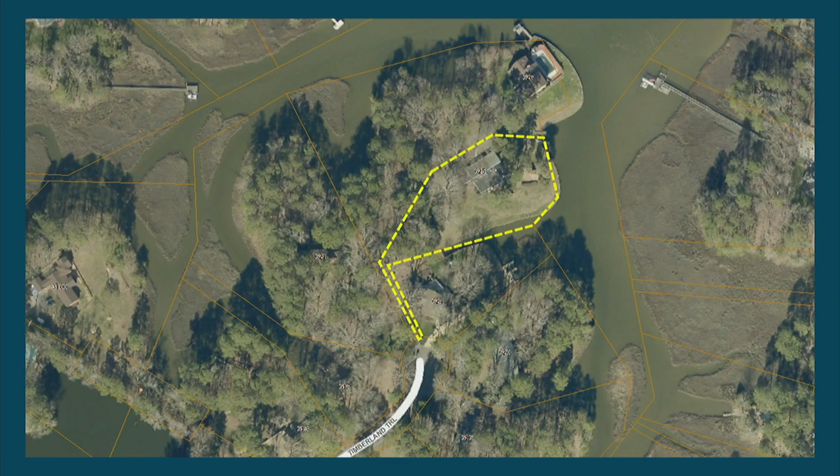Staff moves on to the next agenda item. Agenda item number 4, 1440 West Little Neck Road.

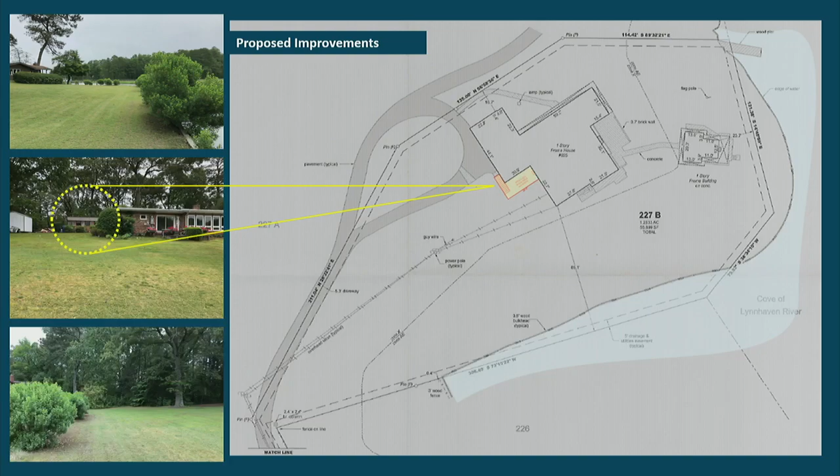The request in front of you today for agenda item number 4 is encroachment into the resource protection area buffer to construct an in-ground swimming pool and modification to the existing paver patio, with an addition to the primary structure.

One of the reasons staff is recommending this item for the consent agenda is that when we conducted our field visit, we met the property owner at the lot. He described that with the addition to the primary structure, they're going to demolish the existing garage and rebuild it with a second story. In doing so, they'll have easy construction access into the rear yard without going around the existing structure, avoiding removal of trees or impacting the critical root zone. Once the swimming pool is constructed and contractors demobilize, they will then build the addition to the primary structure.

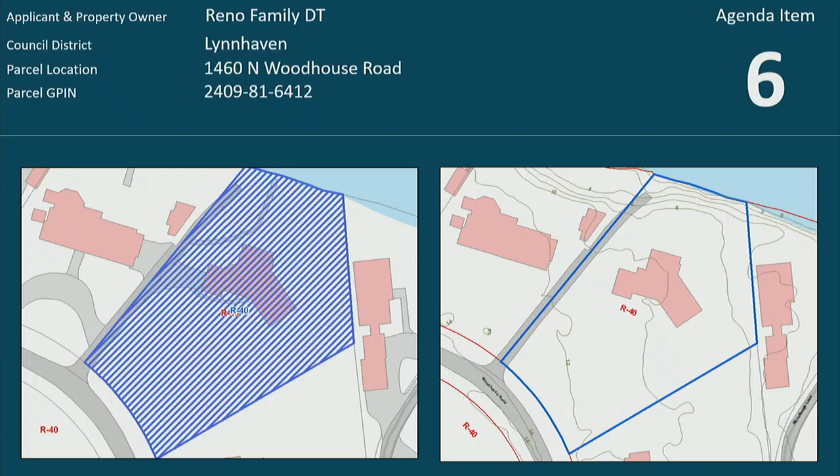Agenda item number 6, 1460 North Woodhouse Road. The request in front of you is encroachment into the resource protection area buffer to construct a single-family residence with associated accessory structures.

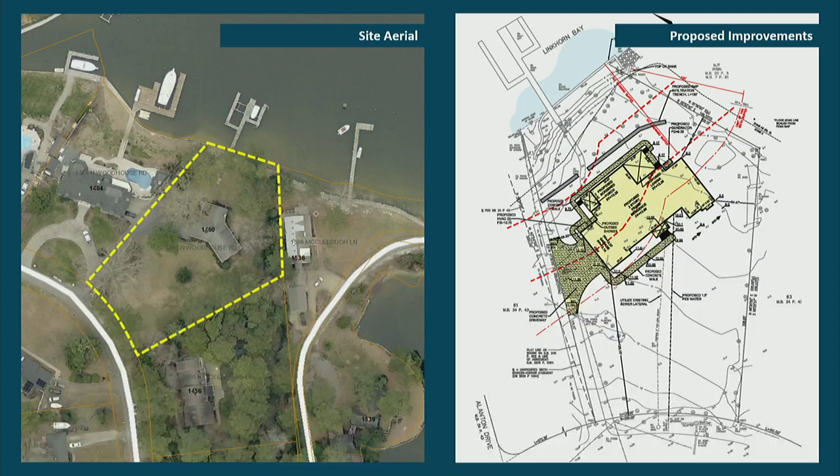Last, staff recommended agenda item number 8, 1000 Curlew Drive. The request in front of you today is encroachment into the resource protection area buffer to construct a single-family residence with associated structures.

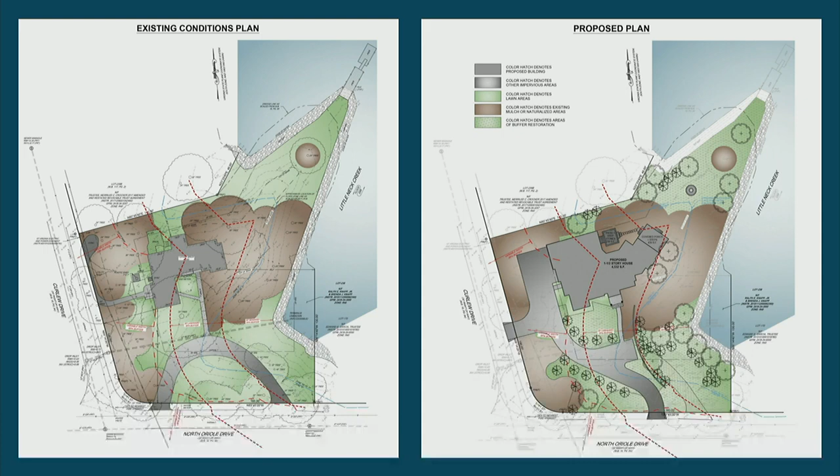Presented on the screen now, on the left-hand side you'll see the existing conditions submitted by the engineer of record, and to the right, the proposed improvements. The engineer of record has also provided a color analysis for the board's review. Everything in blue is the existing footprint of current improvements on the lot, and everything in red is proposed improvements with this variance request.

Of note, on the bottom right-hand side, the areas colored in green offer a retreat of the existing driveway. One of the conditions staff applied is that the driveway stem of the proposed circular drive be constructed out of permeable pavers.

Staff is of the opinion that from the corner of Curlew Drive and also from the corner of North Oriole Drive, the existing grade of those roads is higher than the lot, so you get a lot of sheet flow coming off the public right-of-way through this property. Staff believes the use of permeable pavers on the stem portion of the driveway will act as a level spreader and help filter some of the stormwater runoff.

You'll also note there's a conceptual layout for buffer restoration along the existing riprap of the property.

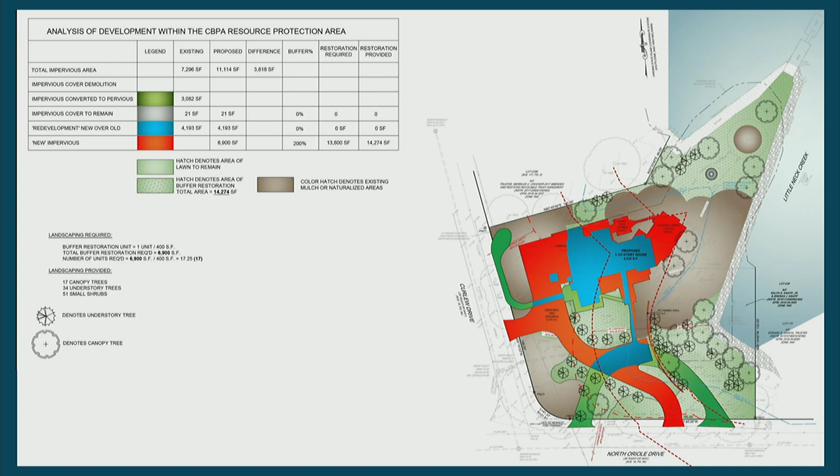At this time, those are all the items recommended for consent by staff. Staff asks that if there are any board members who desire to hear any of these agenda items on the regular agenda at this time, please raise your virtual hand.

Ms. Barrett McDaniels, staff acknowledges your hand. Your microphone is open. Thank you, I do not support application number 4. Thank you, Ms. Barrett, we will move agenda item number 4 to the regular business agenda items.

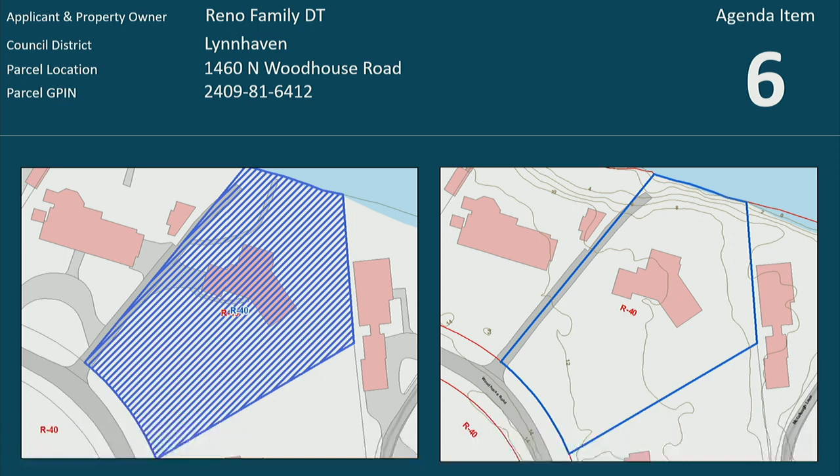At this time, staff moves on to agenda item number 8, 1000 Curlew Drive. We will now hear from the applicant. The applicant, Mr. Garrington, is reminded to state that your disclosure statements are current, your fees have been paid, and that you agree to the conditions in the staff report.

For all board members, Mr. Garrington was sworn in during the item to be deferred. At this time, Mr. Garrington, the microphone is yours.

Thank you, PJ. Thank you, members of the board. For the record, Billy Garrington on behalf of the applicants, Ralph and Brenda Knapp, property known as 1000 Curlew Drive. There are 16 conditions in the staff write-up. We're in total agreement with all 16 conditions. Our disclosure statement is current. All of our fees have been paid, and we thank you very much for your assistance in this request.

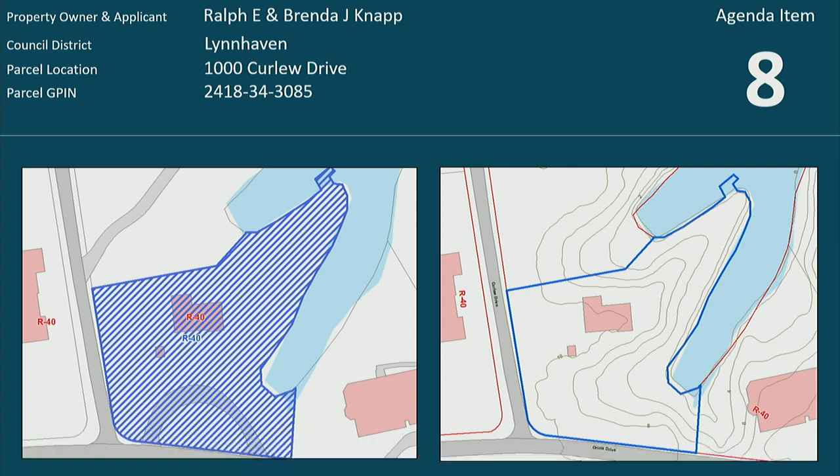Thank you, Mr. Garrington. Mr. Chairman, members of the board, that completes our consent agenda. At this time, are there any further questions for any of the applicants or staff at this time? If so, please raise your hand.

Ms. Barrett McDaniels, staff acknowledges your hand. The microphone is yours.

Thank you, PJ. When reviewing the report, I had actually recommended that item number 5 be added to the consent agenda. Wondering if anybody else supports that.

Thank you, Ms. Barrett McDaniels. And at this time, staff will ask all other members of the board, if you, Ms. Barrett McDaniels is making a recommendation that agenda item number 5, let me pull this up for you real quickly here. Agenda item number 5, Chisholm RT, located at 1325 Chewink Court.

Staff will go through real quickly what you are looking at today: a variance request to modify the November 26, 2012 Chesapeake Bay Preservation Area Board variance to remove condition number 8. Condition number 8 of that variance stated exclusively of the boat basin, if and when the shoreline is rehardened, a riprap revetment shall be constructed in lieu of a vertical retaining structure, i.e. vinyl, timber, or steel bulkhead.

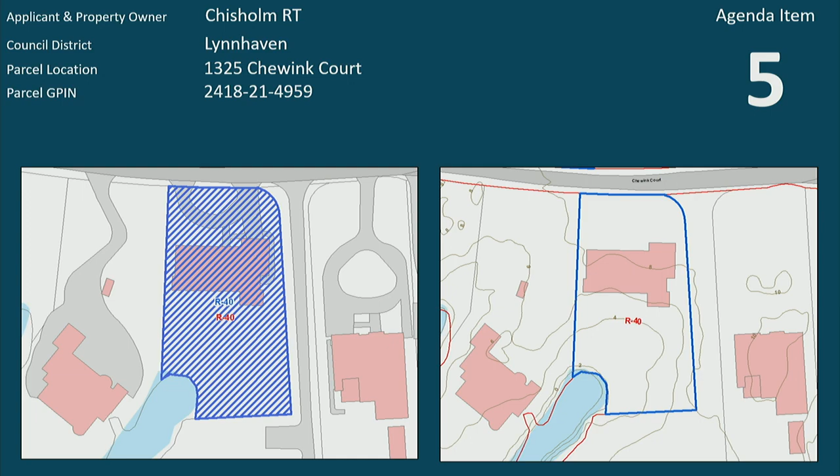Thank you, Mr. Garrington. Mr. Chairman, at this time, we have agenda item number 3, 625 Timberland Trail, agenda item number 5, 1325 Chewink Court, agenda item number 6, 1460 North Woodhouse Road, and agenda item number 8, 1000 Curlew Drive, all on the consent agenda. At this time, Mr. Chairman, staff will pass the microphone over to you to call a motion.

The microphone is yours. Would someone like to make a motion to approve the consent agenda? At this time, staff acknowledges the hand of Mr. McCoy. Mr. McCoy, the microphone is yours.

Mr. Chairman, I'd make a motion to approve item number 3, Kevin and Karen Barney. Item number 5, Chisholm RT. Item number 6, Reno Family BT. And number 8, Ralph and Brenda Knapp, item number 8.

Mr. Chairman, staff opens your microphone to call a second. Would someone like to second Mr. McCoy's motion? Mr. Jones, staff acknowledges your hand. The microphone is yours. I second.

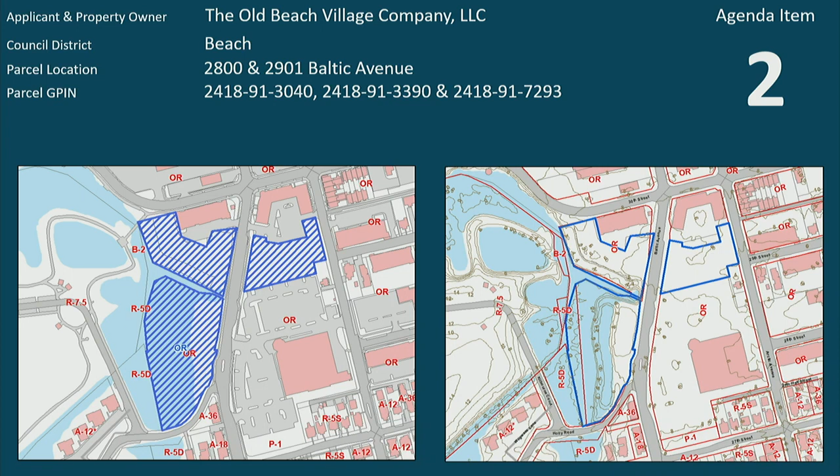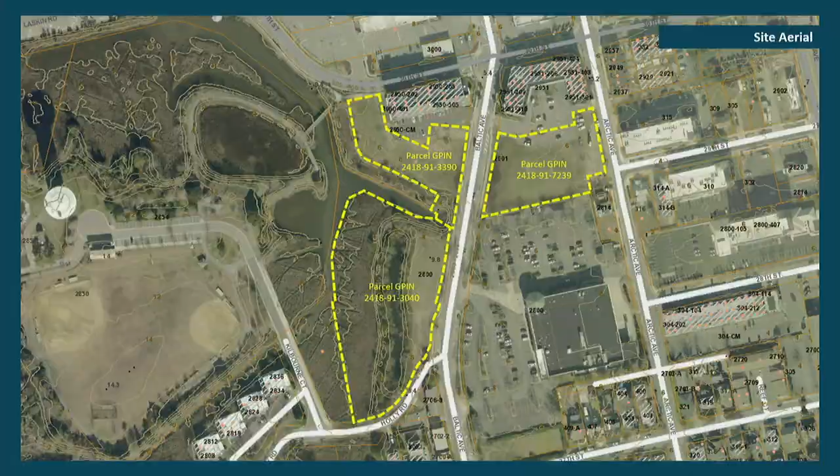Going through staff's presentation, you will see an aerial of the site and the 3 parcels in question today. Looking at an aerial towards the Atlantic Ocean, you'll see the parcel to the north and 2 parcels to the south, or above and below in this situation. It'll actually be east and west.

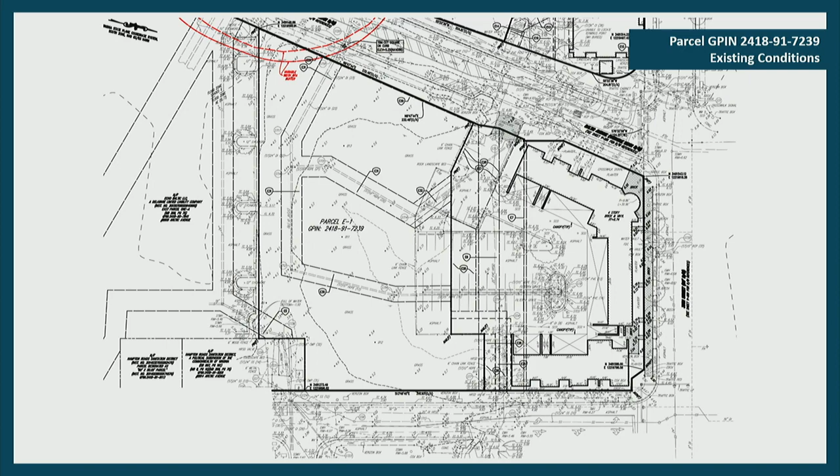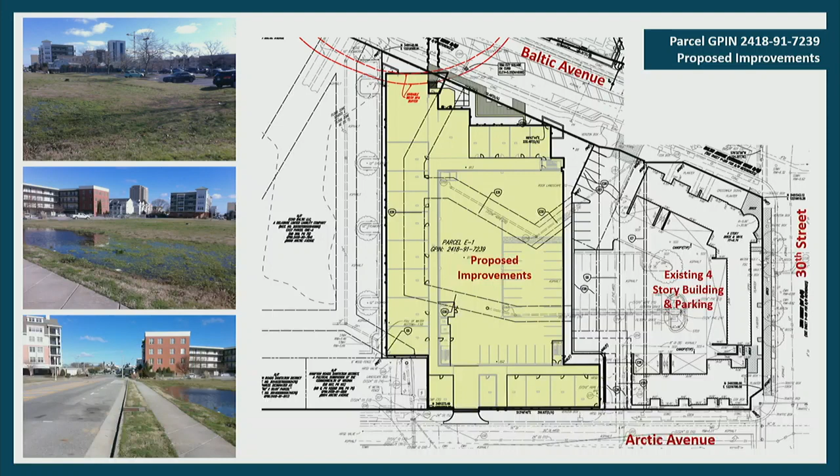Looking at the existing conditions, this is for the parcel adjacent to the Harris Teeter parking lot. On the left-hand side of the screen, the top photo is taken from Baltic Avenue towards the Atlantic Ocean; that is the Harris Teeter parking lot on the right. Then panoramic shots to the north looking down Baltic Avenue, with the proposed improvements highlighted in yellow on the right. Baltic Avenue is at the top of the screen, Arctic Avenue at the bottom, 30th Street to the right. Adjacent to 30th Street are the existing 4-story buildings and parking. When you apply the proposed improvements to the existing aerial, that is what you are looking at.

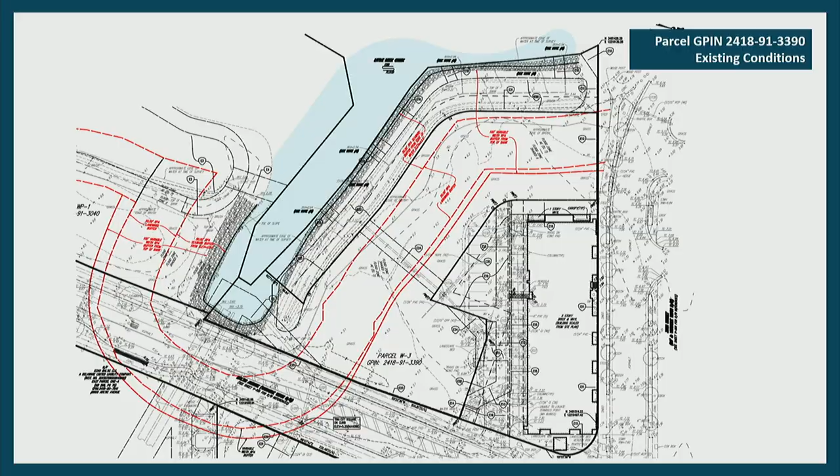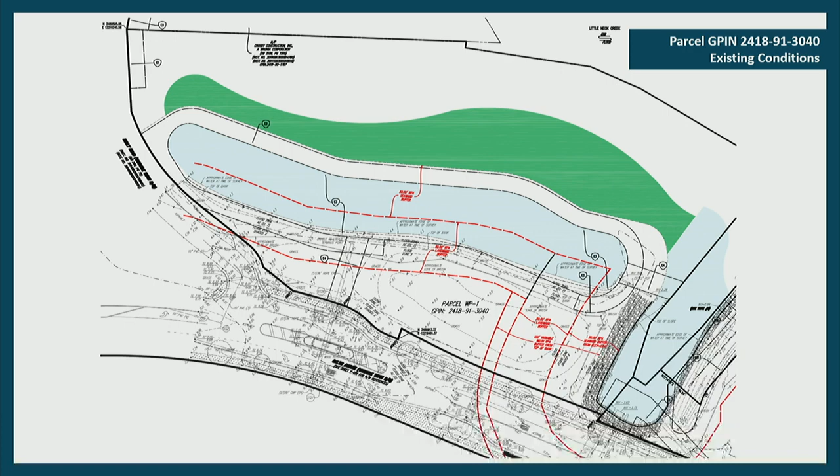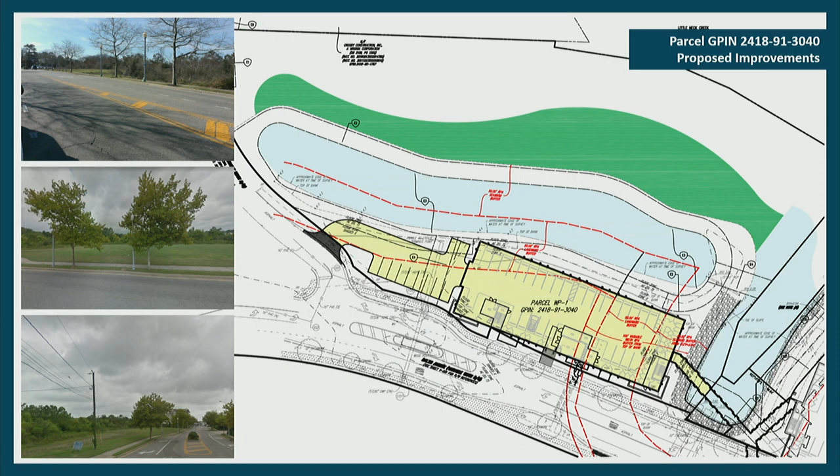Continuing to the south, you have the existing conditions of the parcel adjacent across Baltic Avenue. Looking at the proposed improvements, again there's the connection of those pedestrian bridges in the lower right-hand corner. The site photos on the left-hand side are taken from Baltic Avenue looking south; the clearing in the background is the location of the proposed improvements. Walking down, you'll see the open field, and from the far end of the lot looking north back up on the parcel, that is a schematic site of where those proposed improvements fall.

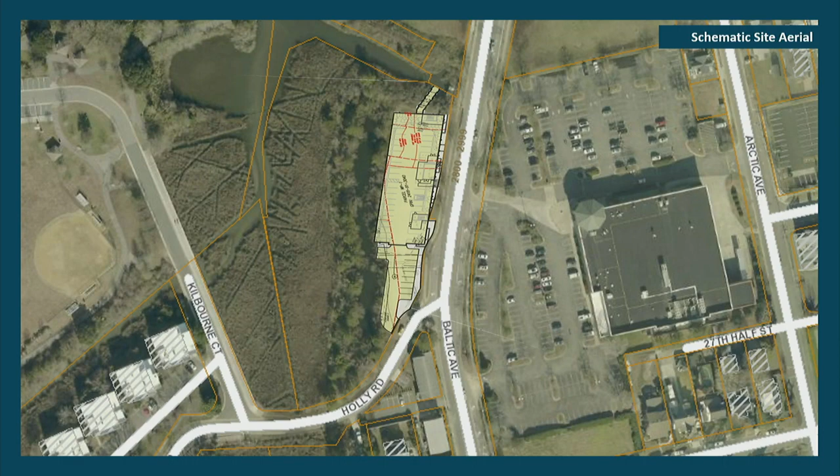At this time, that concludes staff's presentation. Are there any questions by members of the board for staff? Please raise your hand at this time. Mr. Chairman, staff acknowledges your hand; the microphone is yours. Thank you, PJ.

So what I'm not clear on right now compared to the last time this was brought before us is, in fact, is this a further encroachment into the 50-foot seaward setback?

Thank you, Mr. Chairman. Let me go back to...

In regards to the further encroachment, staff has overlaid both the 2004 variance and the variance request in front of you today. In regards to the 6 buildings approved at that time, there is some push and pull on the facades. Overall, staff is of the opinion that the proposed improvements are in substantial compliance with the 6 buildings approved by the CBPA board in 2004.

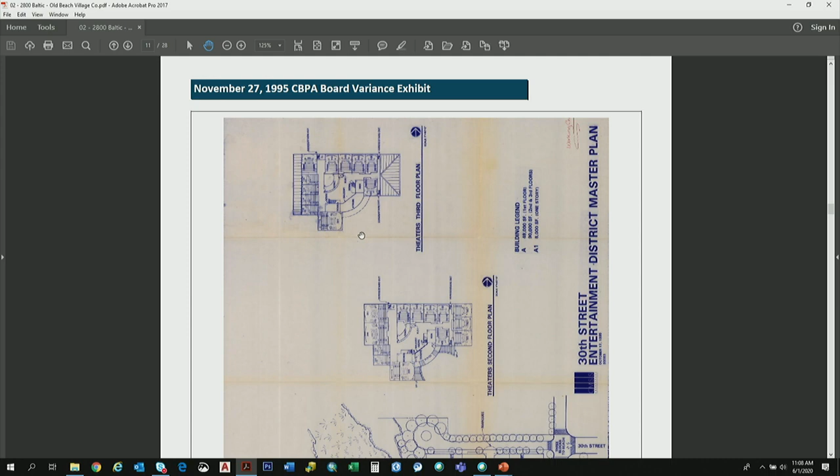So the November 27th, 1995 CBPA variance was not acted upon. Although the variance was granted, you can see on the screen right now, as staff blows it up, it was to develop this parcel. You'll see in the center of your screen right here where the river comes up and connects to Baltic Avenue. With the 1995 variance, you'll see there was actually a bridge to shops proposed further west of Baltic Avenue. The intent was for both parcels to the west of Baltic Avenue to be developed commercially.

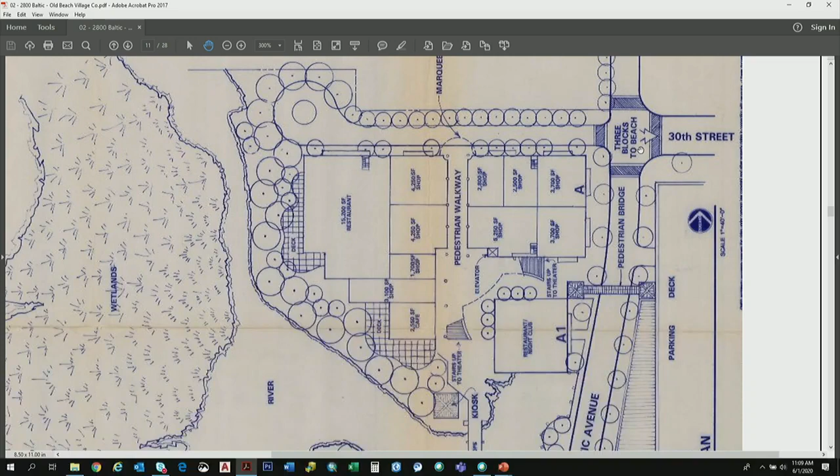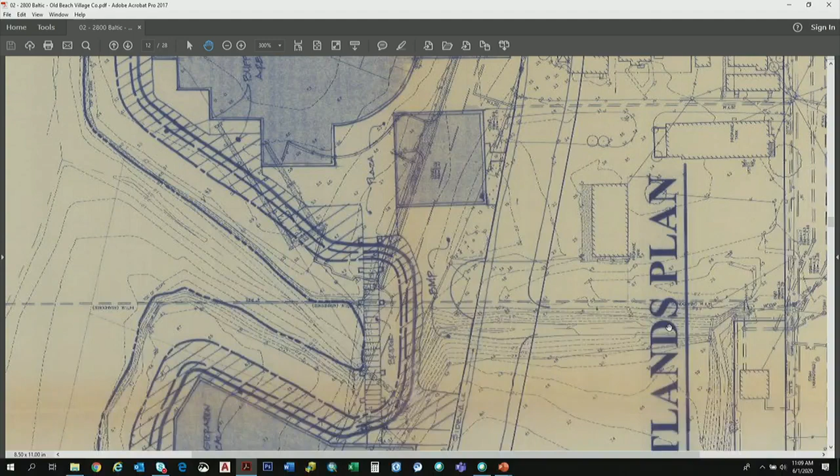You'll see it in this exhibit right here where you see 30th Street at the top of your page come in, and at that time it was actually proposed to cul-de-sac. Now that actually goes to the north and connects over to Laskin Road. With that development in 1995, you'll see where that bridge came over, and there were just these sort of generic areas for proposed improvements highlighted in blue, with the pedestrian plaza coming across the bridge. You'll notice the topography that works up to the right of your screen, east of Baltic Avenue. And then the parcel on the lower section, another area of development for commercial.

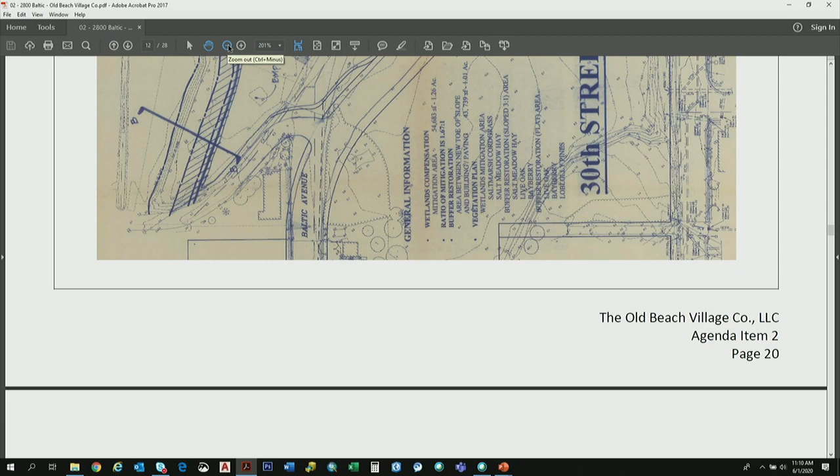From that, we transitioned into the 1997 variance, which was granted for the construction of the Harris Teeter grocery, wetlands mitigation, and alteration to the previously approved plan from 1995. What you see on the screen right now is that proposed improvement. If you're following along in the staff report, that is page 20. You'll see again on the west side of Baltic Avenue an area development, commercial development for the parcel located to the north, as well as an area development for the parcel to the south.

On the lower right-hand corner, you will see the Harris Teeter grocery store and associated parking. Just north of that is another commercial area. Portions of that variance request have been acted upon, specifically the construction of the Harris Teeter grocery store and associated infrastructure.

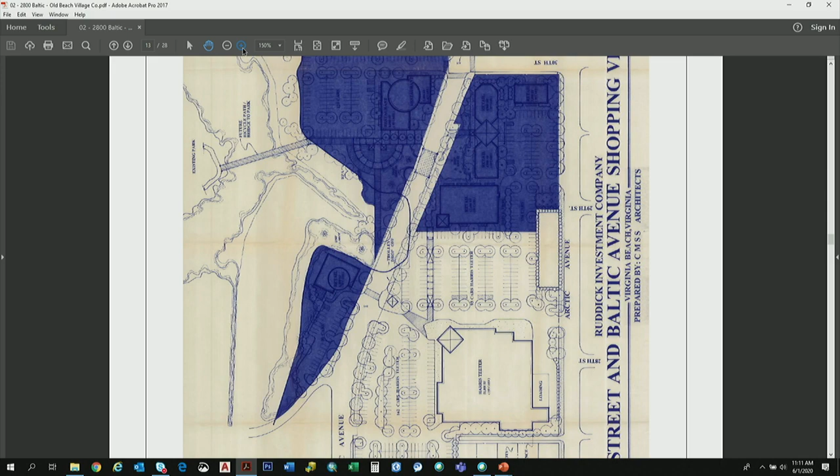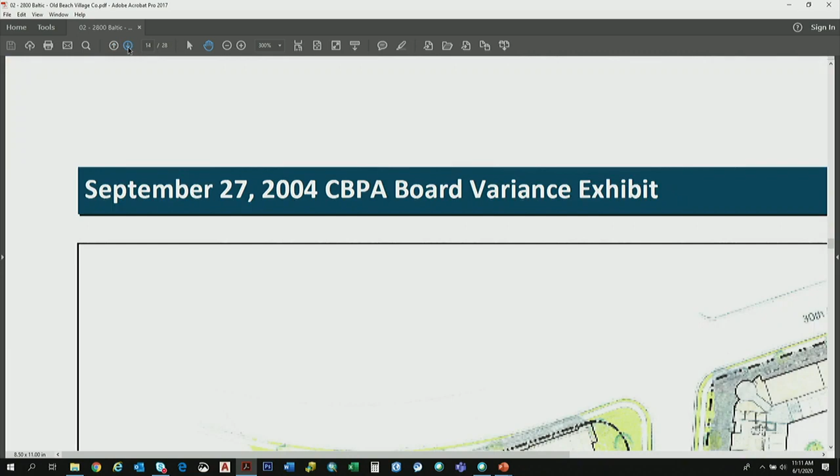As well as the stormwater management facilities. With this 1997 variance, if you look closely along Baltic Avenue, you will see some sort of connection from that northern parcel out to the right-of-way. From that, we then transitioned into the 2004 CBPA variance.

So the Harris Teeter was constructed. You'll see the parcel to the north. At the top of the screen, one of the existing buildings today that has been built is located at the top, and then below that, you'll see this sort of C-shaped building that wraps its way around.

Staff had mentioned earlier, all this area inside here was proposed parking and impervious. You'll see one little green island right here, and then underground parking that went all the way through, including the gap between the two buildings.

The revised plan that you have in front of you today has a green space that works its way up with a pedestrian bridge, to staff's understanding, that goes from the residential floors and not the underground or at-grade parking underneath the buildings. In this variance request, you did not have any connection over the waterway.

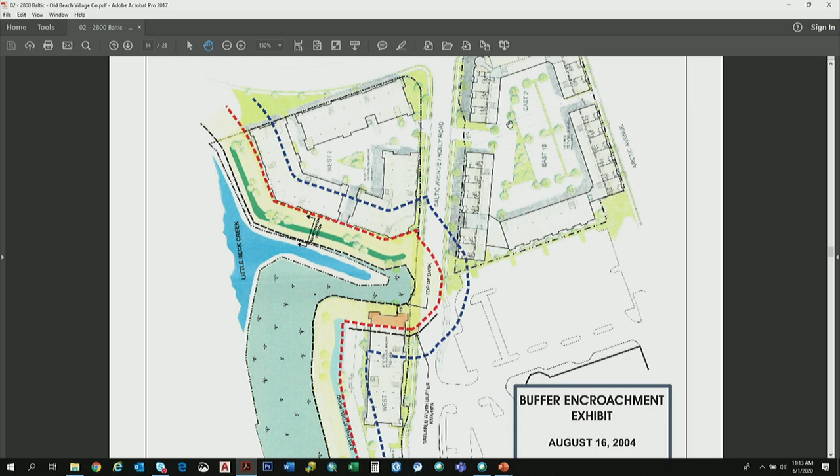You also have the parcel located to the east of Baltic Avenue, which the buildings to the north have been constructed. And right now, the buildings to the south, with modifications to that building footprint, are being proposed here.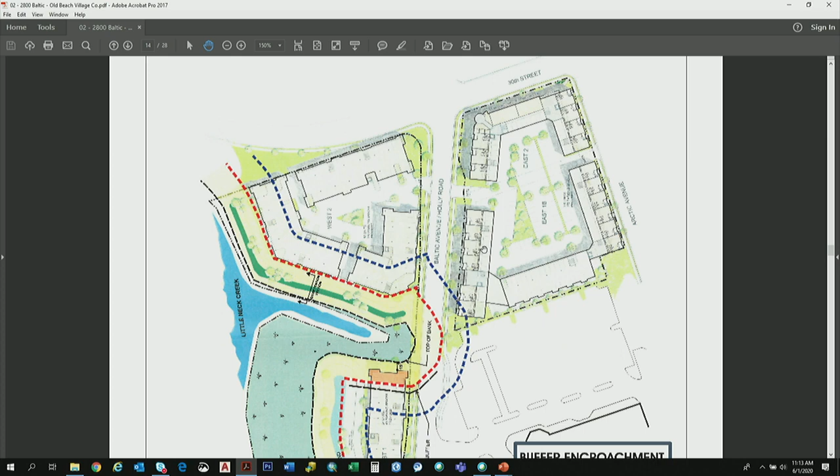The variance request for, let me get the date correct here, the September 26, 2011 public hearing that was withdrawn was for this parcel right here. It's staff's understanding that at that time, that 2011 variance request was a potential location for the current iFly facility, which is located down off of Pacific Avenue.

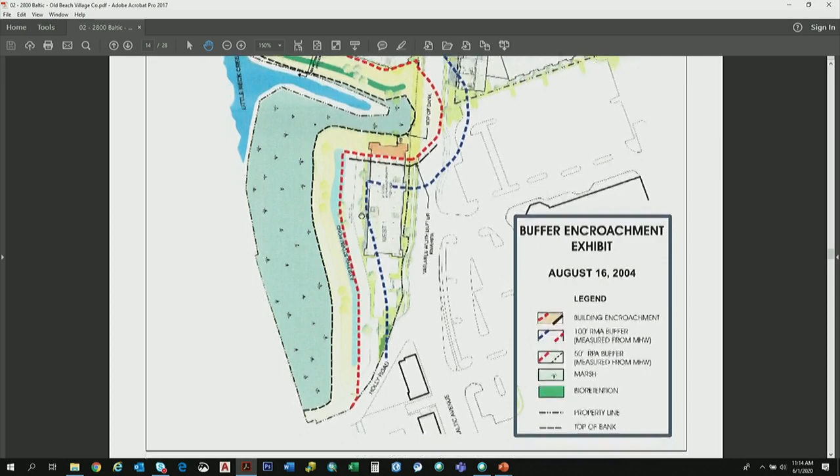And then with that 2004 CBPA variance, if you're following along in your staff report, on page 23, you'll also see the drainage exhibit associated with that.

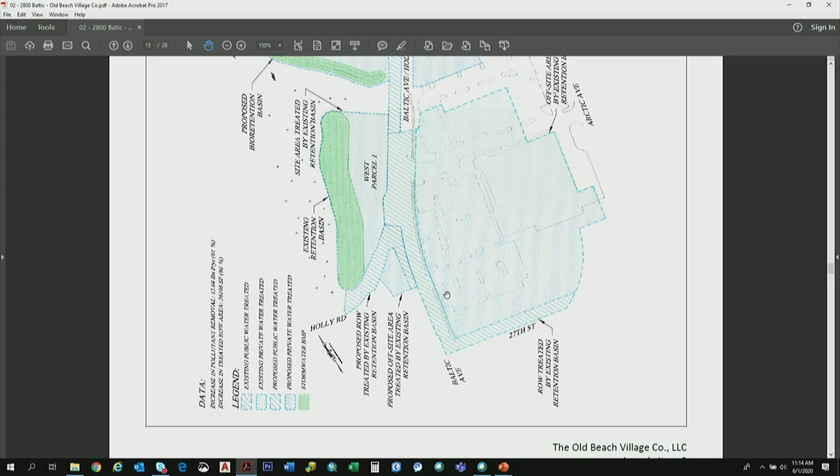So I'm looking specifically at the requirements of the 1997 variance, because it has a lot to do with mitigation and stormwater management. And also the 2004, again, restates some stormwater management and some buffer encroachments or non-encroachments. So again, explain to me why those things we would not have attached to the current set of conditions. Why are we superseding those requirements?

You actually bring up a great point. With staff's current conditions and the history on this, we would actually make a recommendation that instead of superseding it, that our conditions are in addition to, and then we could carry all of the history of this variance application forward.

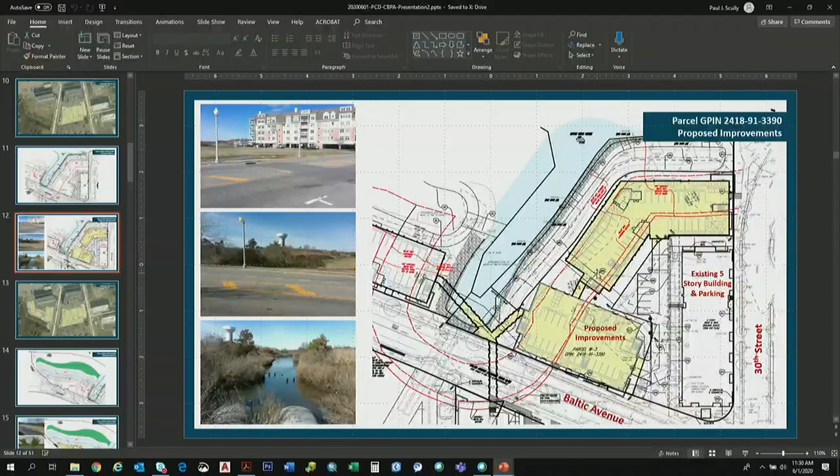So along the western portion, west of Baltic Avenue on the northern lot, staff will drop into the presentation. All right, there we go.

And what you will see, Mr. France, along the southern part of those buildings, specifically the one that clips adjacent to Baltic Avenue, you will see that encroachment for the pedestrian bridge, the stairwell, and a small portion of the building, specifically the left corner, that encroaches into the resource protection area, 50-foot seaward buffer. That's where the modifications are made, and those modifications are landward of the existing BMP. What is different, though, is that between the gap between those two buildings is vegetated. The 2004 variance had that as a solid facade with parking underneath. So there's actually a balance with that further encroachment with the opening between those two buildings as pervious, whereas in 2004 they were shown as impervious.

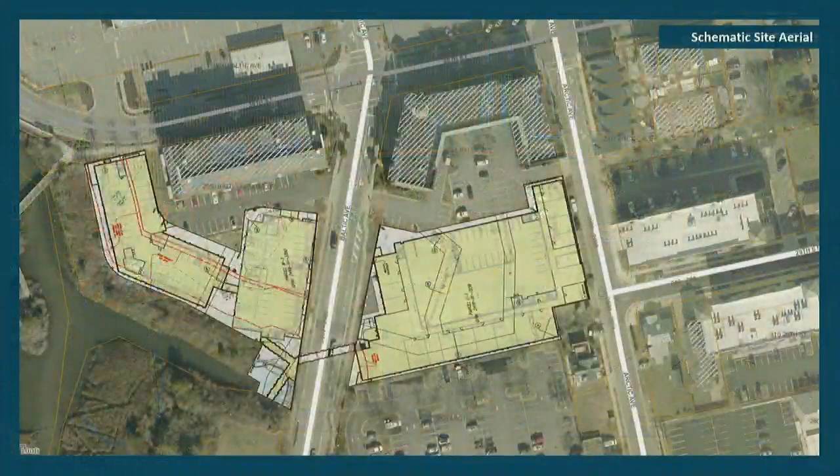The primary difference here is, as Mr. Scully has indicated, the addition of the skywalk features. These features are elevated 30 feet above the ground. They traverse the west side of Baltic, connecting the building by Harris Teeter with the building behind the flats and the lofts, and one traverses across Baltic Avenue into the new building where the large parking structure is located.

So those were the primary differences. Mr. France, I never meant to indicate this is exactly the same. Those changes were also pointed out in staff review at the February meeting, so we're not hiding anything, but we felt they were basically the same application. The difference being the changes due to the bridge location and the support structures needed to support them. And you're correct — the only thing touching the ground differently was the 124 feet of area where the base of these structures would be located.

We did go to great lengths to try to define that for you. And I'd also like to point out, as a result of those changes, my client agreed to significant other improvements that would make this application even better than it was in 2004.

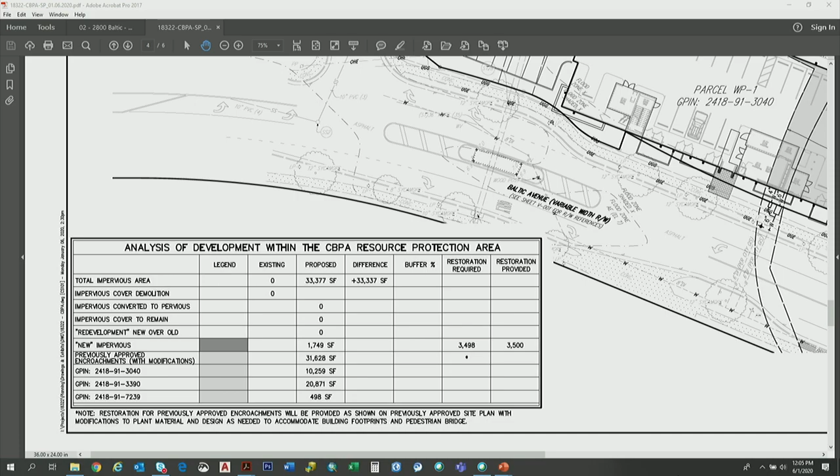Thank you, PJ. Dave, that was addressed, I believe, in the previous meeting, read into record. If my calculations are correct, if that's an 8-foot wide walkway, it's about 218 feet linearly. They said something, I don't know if it was that specific to that account, but they did mention that the new impervious was that in the previous meeting. That's all I have. Thank you.

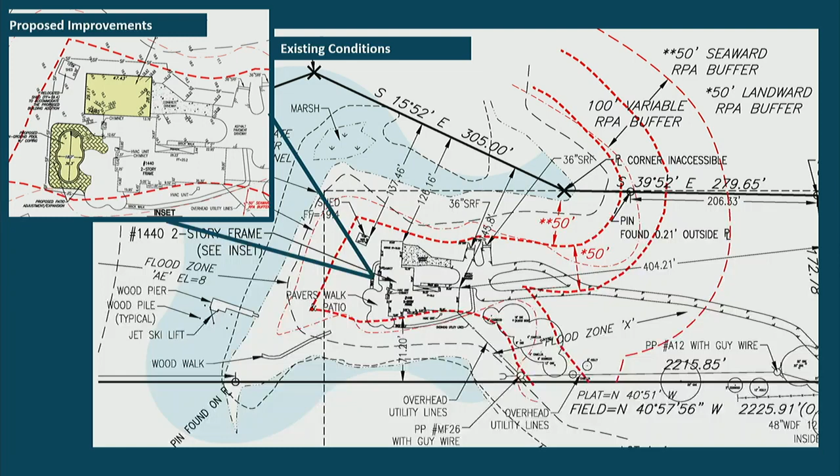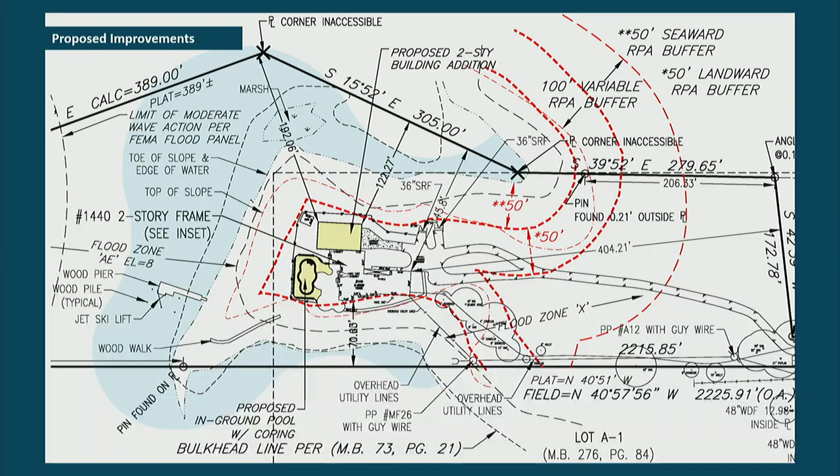An enlargement of the proposed improvements is now shown on the screen. You'll see where the edge of water is, the top of bank, and the location of those proposed improvements.

Moving along to our last agenda item on the regular agenda. Agenda item number 7, Atmore Lane, parcel GPIN 1479905771. The request in front of you today is to construct a single-family residence with associated accessory structures.

Looking at staff's presentation, you will see that this lot is a peninsula-shaped lot which has not been developed. The site aerial shows the development that has occurred within the neighborhood on the adjoining lots. Looking at the existing conditions of the lot, staff has put together a panoramic at the top of the presentation. You will see the condition of the shoreline along the water's edge, which is relatively open, and as you transition up the bank to the center you have a more shrub-based canopy tree layering.

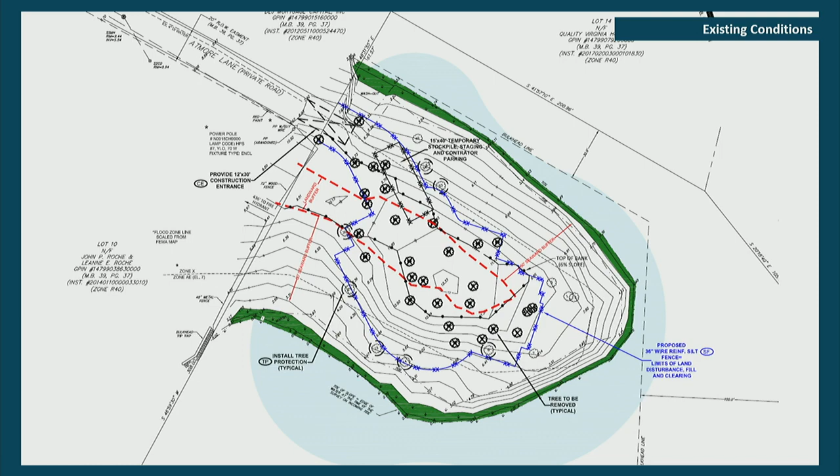Looking at the existing conditions, staff has provided color to this exhibit. In blue, you will see the layout of the silt fence, which is approximately 10 feet outboard of the proposed improvements. You will see the unique shape of this peninsula lot and how the 50-foot seaward buffer impacts both sides. With the proposed layouts, the proposed improvements try to follow the shape of that peninsula as best they can.

Staff would also like to mention that we met with the applicant's engineer of record at the initial submittal. At that time, the proposed residence was turned about 90 degrees and ran perpendicular to the existing contours. During that meeting, Mr. Payne made a recommendation to the applicant's agent about shifting the proposed improvements so that they aligned more with the existing contours, and you will see that layout represented on the screen right now.

In addition, on page 97 of the staff report, the second paragraph of the evaluation, staff made a comment that given the sensitive environmental features encumber the vast majority of this lot, staff did not support the amount of impervious surface proposed, specific to the use of materials. Staff wants to point out that specific to the use of materials on the application submitted, you will see the proposed driveway associated with the improvements as being concrete.

Mr. Chairman, at this time staff does not see any hands raised by -- actually, correction, Ms. Barrett McDaniels, staff acknowledges your hand. The microphone is yours.

Thank you, PJ. With the introduction of the pervious pavers versus concrete, does the staff now support the application? And then also, I have a question about the south side where the house and patio actually encroach into the bank of the river. Is that some type of wall, because I don't know how they'll get that fill, and the house is at 14 and they're on a steep slope there. So will that be retaining wall all the way around that portion, mainly the south side of the house? Thank you.

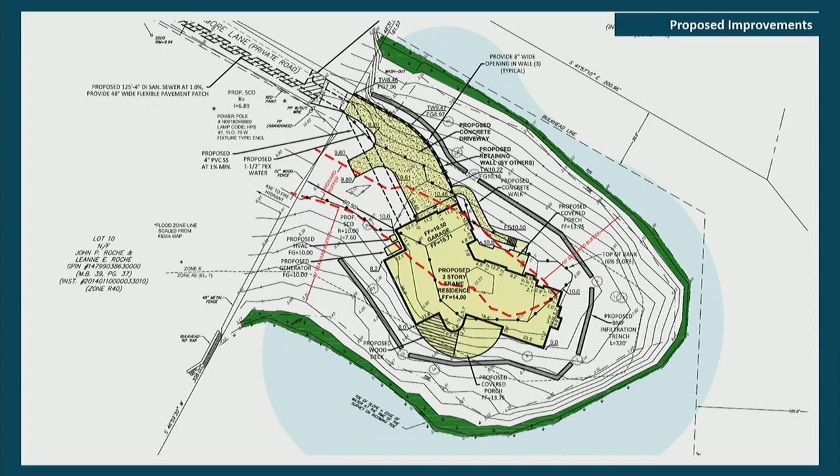The deck that Ms. Barrett McDaniels asked about has always been open pile with underdeck treatment. No retaining structure on that side as it pertains to the decking.

I won't go through the rest of what PJ mentioned. The only other thing I'll say is that the staff report includes all of the necessary statements that form the appropriate basis for the findings of the board to grant the variance as conditioned. All 21 conditions are acceptable to the applicant. Happy to answer any questions.

Thank you, Mr. Bourdon. At this time, are there any questions for Mr. Bourdon from members of the board? Mr. France, staff acknowledges your hand. The microphone is yours.

Thank you, Mr. Scully. I'm going to have a couple of questions, so I'll start with one so we don't lose track of them. This proposed development does not show any water access whatsoever. Can you speak to the applicant's desire to have access to the water and its lack of evidence on the proposed plan?